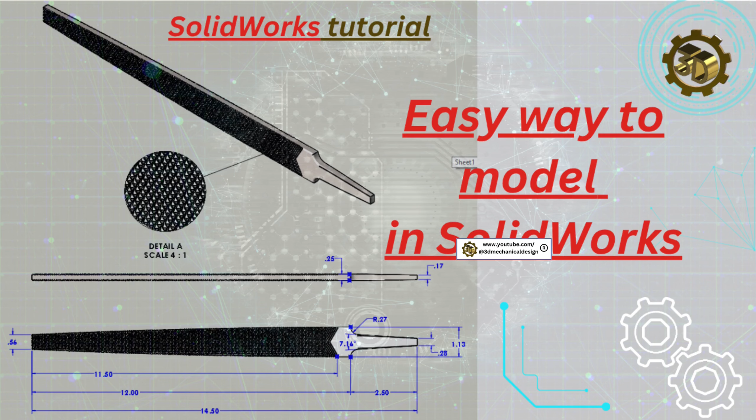In this SolidWorks tutorial, I'll guide you step by step through modeling a rectangular file with detailed knurling on both sides. Getting started: sketching the file profile.

Begin by selecting the top plane and start a new sketch. Draw half of the file's profile along the horizontal centerline. This speeds up the process and ensures symmetry. Add all necessary dimensions to fully define the sketch. Watch for the red arrows on screen highlighting each dimension as it's applied.

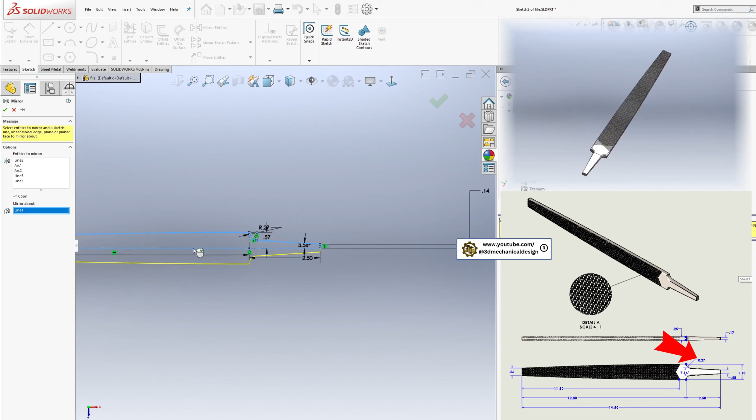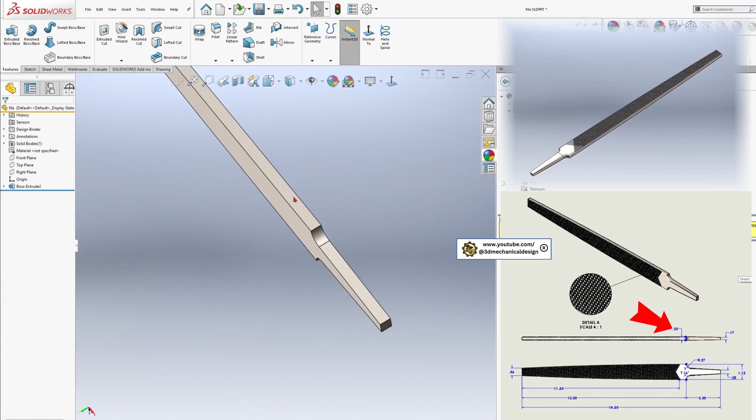Creating the 3D body. Use the Boss Extrude feature to give the file its thickness. Set the depth to 0.25 inches. Next, add a bevel by sketching and cutting a 0.17-inch chamfer on the appropriate edge. Use the mirror tool if needed to apply it symmetrically.

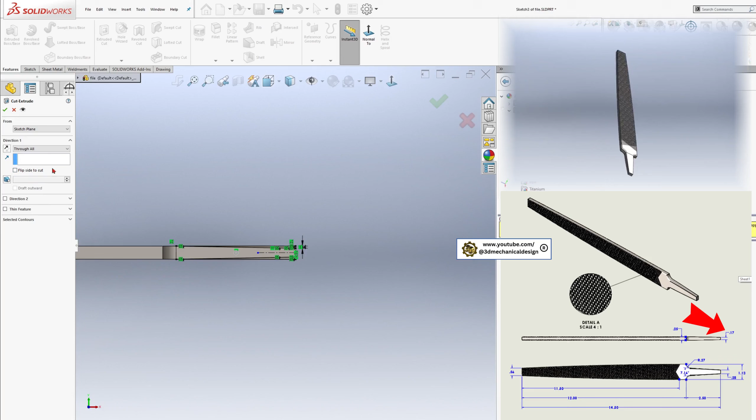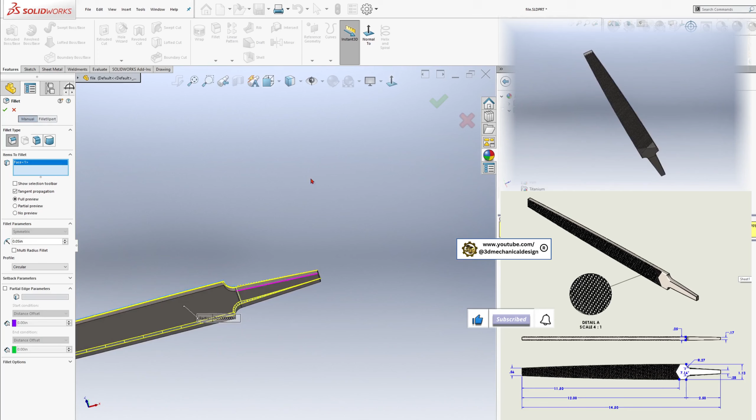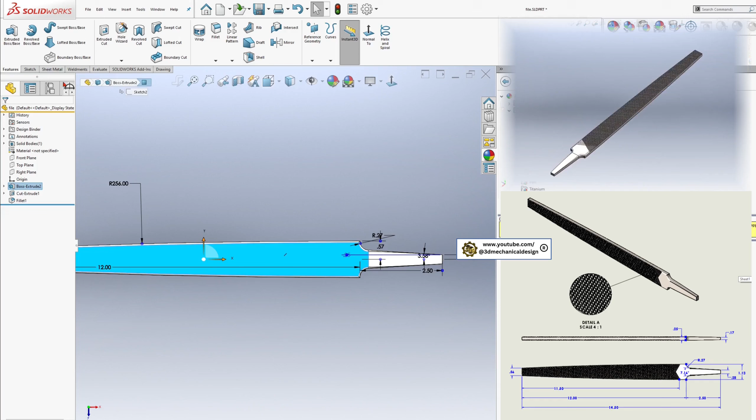Apply a 0.05-inch fillet to the edges for a finished look. Adding knurling to the surface. Select the face where you want to add knurling and start a new sketch. Draw a line at a 60-degree angle 3 inches from the right edge.

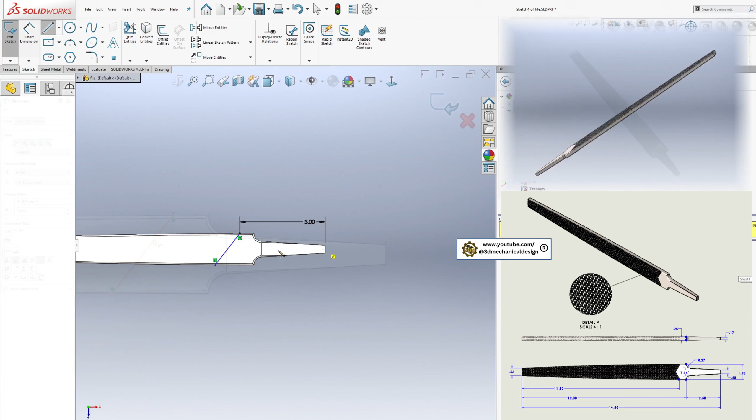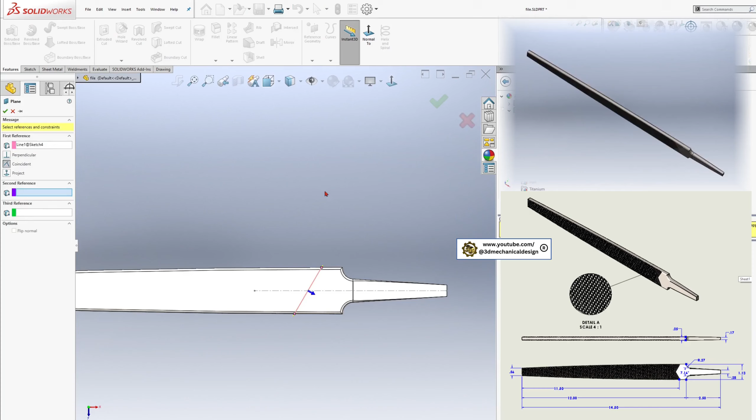Create a new plane at 90 degrees to this line. On this plane, sketch a square profile, 0.06 by 0.06 inches.

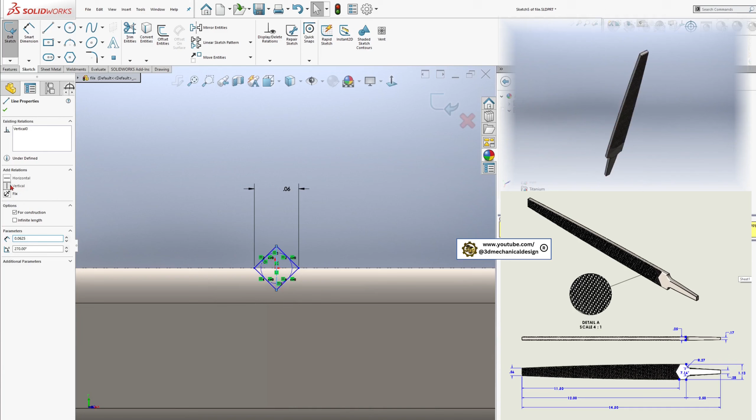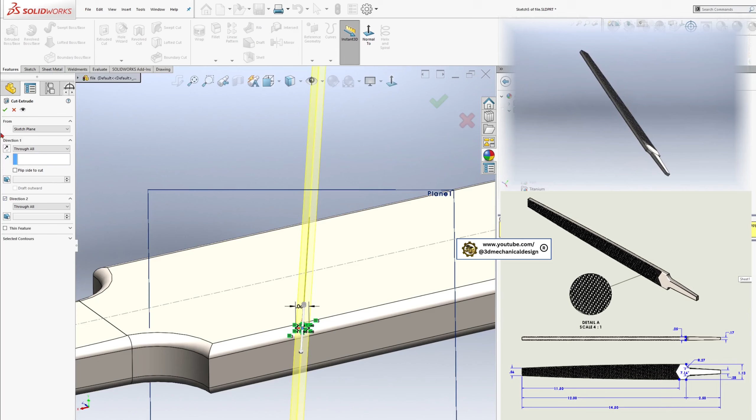Use the extruded cut feature to remove material along this path, forming the first knurl groove. Apply a linear pattern to repeat this cut across the surface, setting the spacing to 0.075 inches.

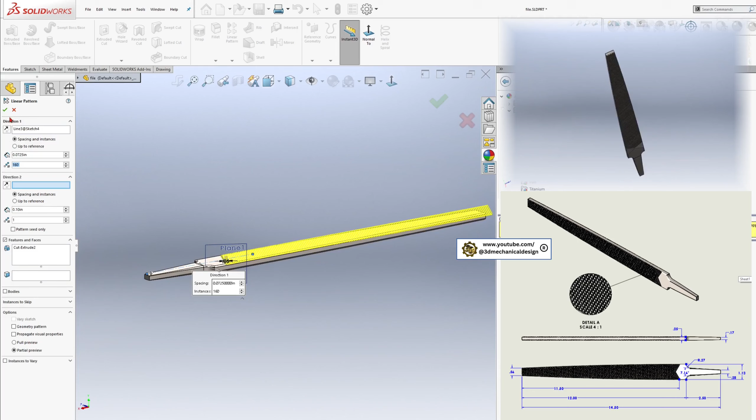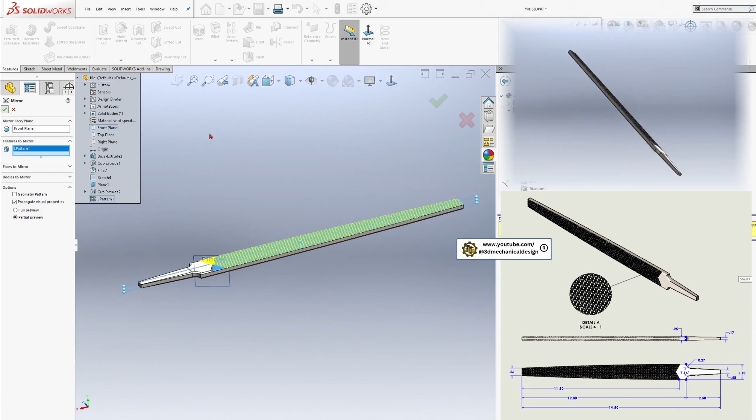Mirror the pattern across the front plane to complete one direction of the knurl. Finishing the knurling on the other side. Add a plane between the two main faces of the file.

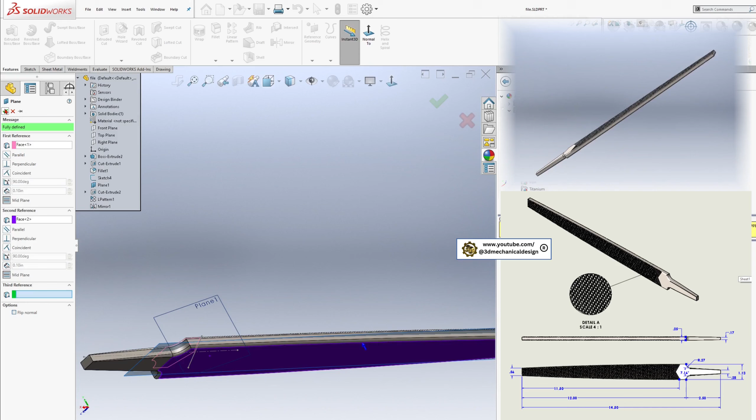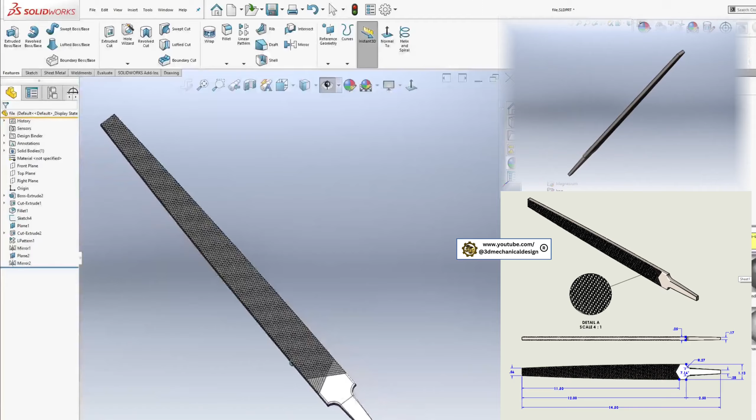Use this plane to repeat the knurling process on the opposite side, using a mirror tool so that both sides have the same knurling texture. Congratulations! You now have a detailed 3D model of a file with knurling on both sides.